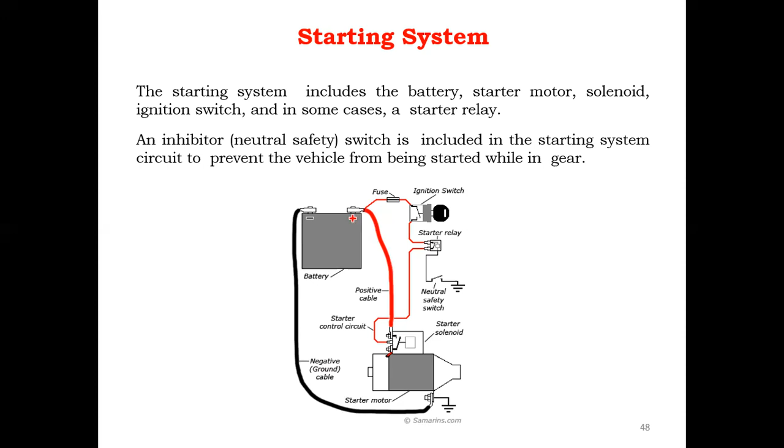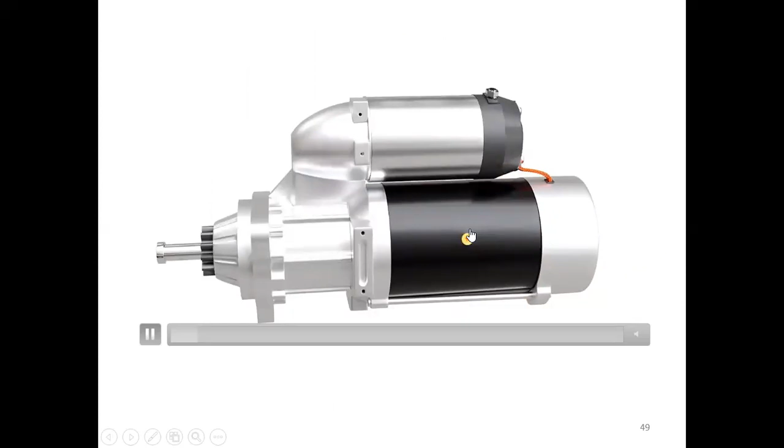Let's see the video showing the working condition of the starter. This is the model: these two components are the solenoid and the starter motor, and this is the pinion. When the starter motor is enabled, this pinion connects directly to the rotor. This is the motor, the starter motor, and this is the battery.

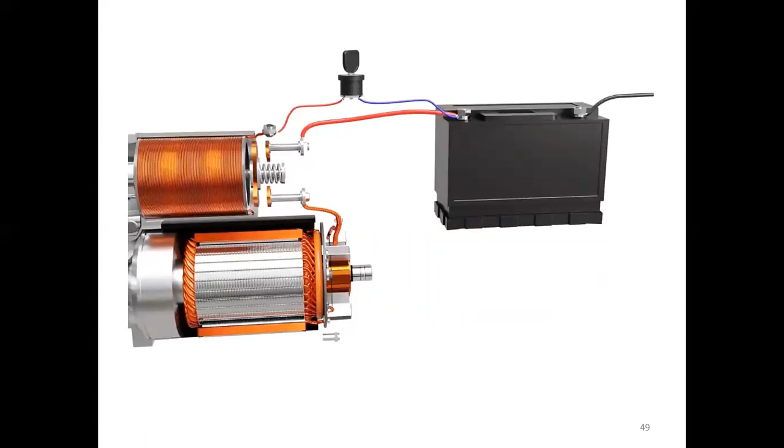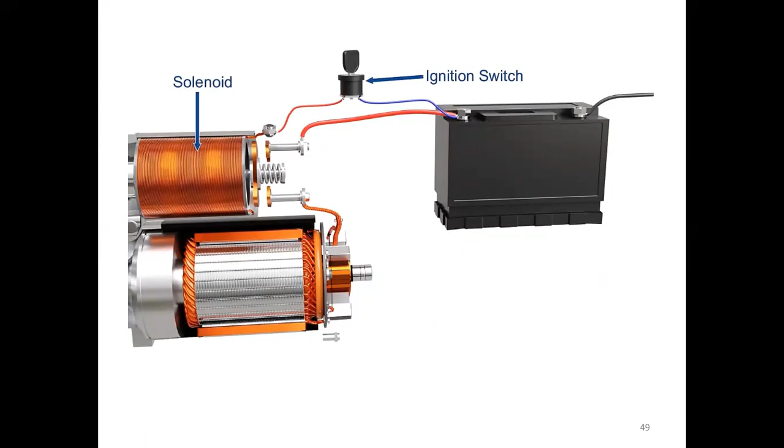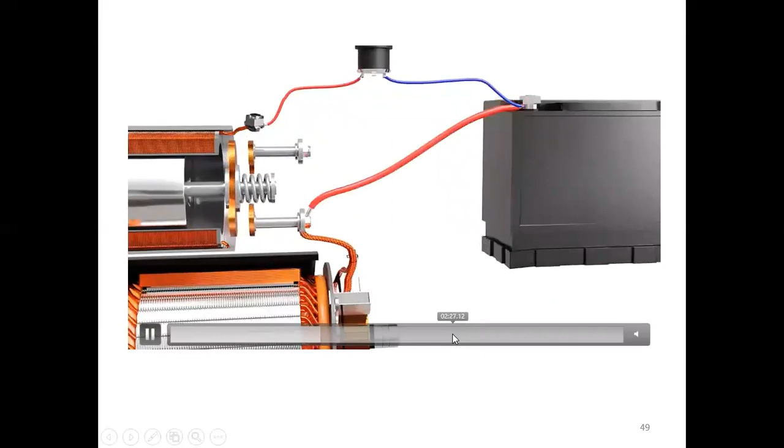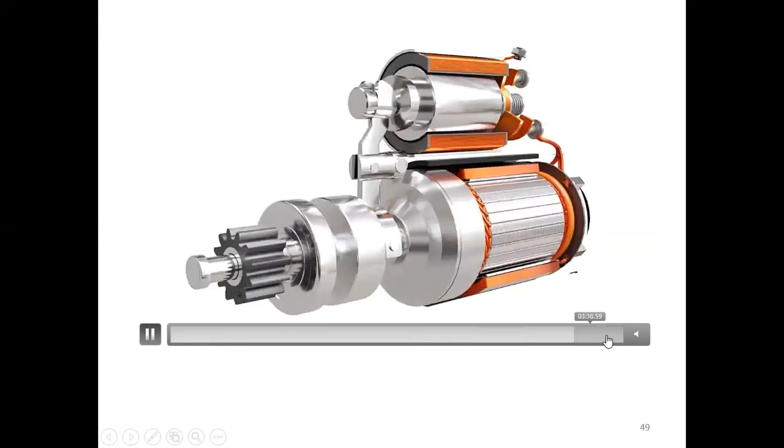Solenoid valve - when the engine is started, it connects to the motor. This is the connection between the engine rotor and the starter motor. These are the processes shown in this basic model of the circuit.

The starting system is defined by its main components that enable cranking of the internal combustion engine. The main components are the battery, ignition key, flywheel, starter solenoid, electric motor, overrunning clutch, pinion, and electric cabling, which includes the command circuit and power circuit. These are the main components between the input and output side.

The starter fuse protects against over currents in the control circuit, while the power circuit is unfused. Next is the starter relay, which connects to the starter solenoid and reduces the control current at the ignition switch.

The neutral or clutch safety switch: in automatic transmission it signals neutral or park position, while in manual transmission it signals clutch actuation. These are the main requirements of the starting system.

When the starting system works properly, it needs to support high currents through the battery, wiring, connectors, relays, switches, brushes, commutator, stator, and rotor winding. The starter current draw is typically 100 to 200 amperes for a few seconds, with peak currents greater than 500 amps for several seconds. It also needs adequate power and torque to support the engine plus other loads.

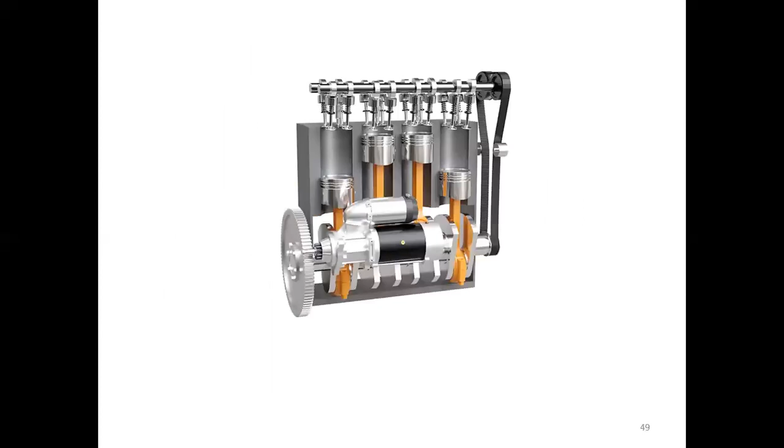The starting system is built to a high standard: compact size, less weight, silent operation, and low cost. These are the basic main components of the starting system. Now let's see the working of the motor.

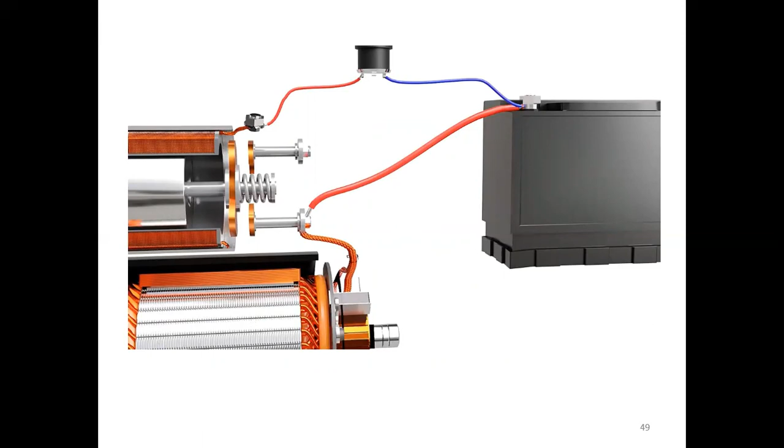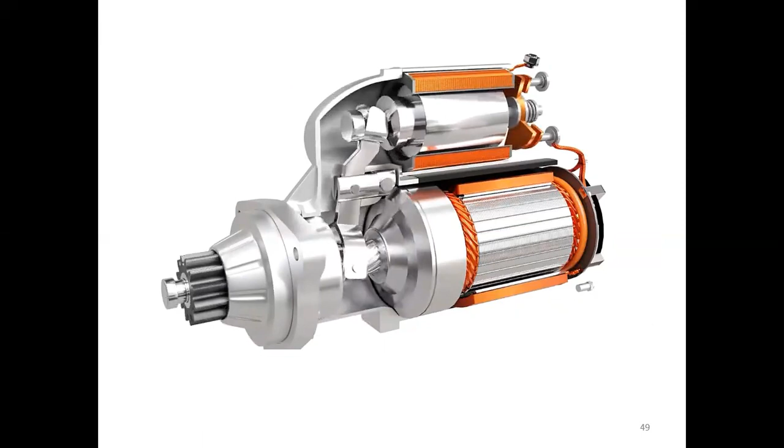Let's simply see the video - it will demonstrate the basic concept. Once the motor is enabled, the solenoid valve connects the starter motor to the engine flywheel. That's the main concept of the solenoid valve.

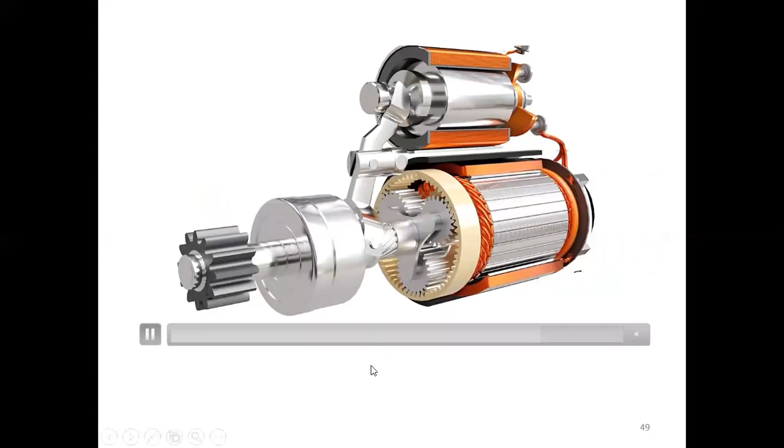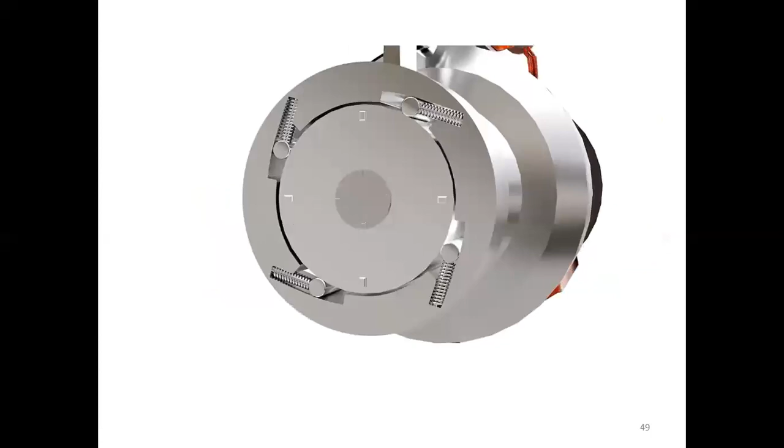The internal gears are used for the rotation of the engine flywheel - one is the sun gear, another is the ring gear, and the carrier. These are the rollers, outer races, and inner race.